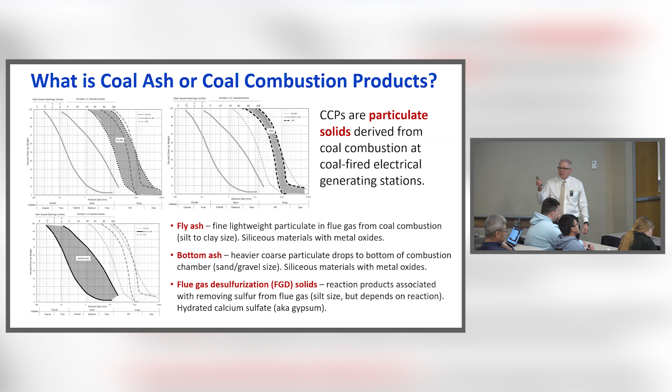That's this stuff up here in the left, and this is a particle size curve. For those of you who have been in your geotechnical courses, this is percent finer and this is particle size. The fly ashes are in the silt, fine sand, but predominantly silt size all the way over to the clay. They're typically very fine, powdery type materials in the silt size particle range.

This is just some examples of fly ash. You can just look like powdery materials. That's what we're catching that's going up in the gas. We're collecting that with either electrostatic precipitation or with a bag house.

Coal-fired utilities generate lots and lots of fly ash as they burn coal, because if you had a fire in your fire pit when you're burning wood, you see the fly ash come up. The same thing is happening in a coal-fired power plant.

The other thing that we generate from that process of burning coal is bottom ash. We generate larger particulate that are too large to essentially move up in the gas stream and float, and they'll drop to the bottom. That's so-called bottom ash. That tends to be more on the fine gravel to sand size, maybe down in the silt too, but falls into this size of a particle size curve. But you look at bottom ash, it looks like gray sand. And we'll collect that as well.

Another thing that we generate often today at power plants, because not only are we concerned about this particulate, but what else is in the exhaust for the flue gas from a coal-fired combustion? Greenhouse gases. And what else? Everybody remember about acid rain? Right, sulfur.

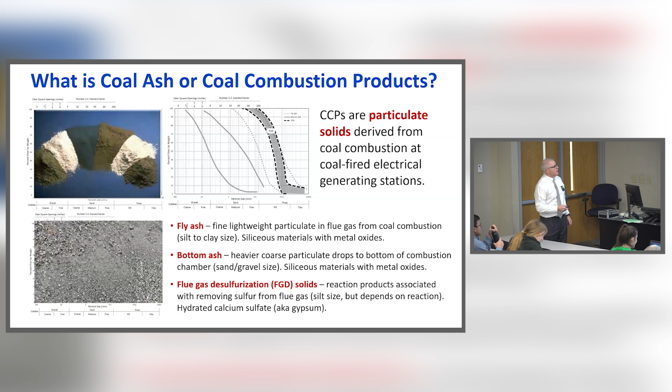So we burn the coal, we have sulfur in the coal, we'll burn that coal, and that releases sulfur into the flue gas. If we don't capture that, we'd generate acid rain. So we'll capture that sulfur as well. That's called so-called flue gas desulfurization residual, or FGD. We have to have a good acronym for everything. That's also a fine textured sludge type material. Just a photograph of that as well. That tends to be a hydrated calcium sulfate.

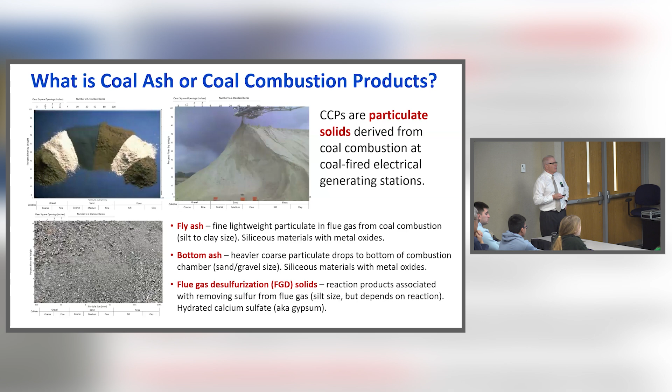So these are the products we're talking about: fly ash in the upper left, bottom ash in the lower left, and flue gas desulfurization solids. We're really going to focus on the two on the left for materials to use as supplemental cementitious materials in concrete. We'll talk about what that means.

Now, there's a lot of different ways to manage coal ash, but two are predominant. One is called dry disposal. That's less problematic, but we have dry ash and we put it in a landfill. But a more common technique, particularly in the eastern United States and the southern United States, but some right here in the Midwest, and I bet there's some here in Missouri, is so-called hydraulic disposal of coal ash.

So you think of, we have a boiler, we're burning the coal, we're generating flue gas, and we're removing the fine particulate from that with a system. We have bottom ash that's being generated at the bottom of our boiler, and we convey that ash with hydraulic techniques. We essentially rinse it out with water, put it in a pipeline, and pump it out to a pond. I think of it kind of like hosing off your garage floor, the particulate off your garage floor. It's not a lot different. You essentially fluidize the particulate, put it in a pipeline, and send it out to a wastewater treatment basin.

Often you'll have the bottom ash, the fly ash, and sometimes the sulfur removal will be commingled with that. A lot of power plants have tried to separate that as well. You may actually have the rest of the wastewater streams as well at the power plant, all going into that same pipeline.

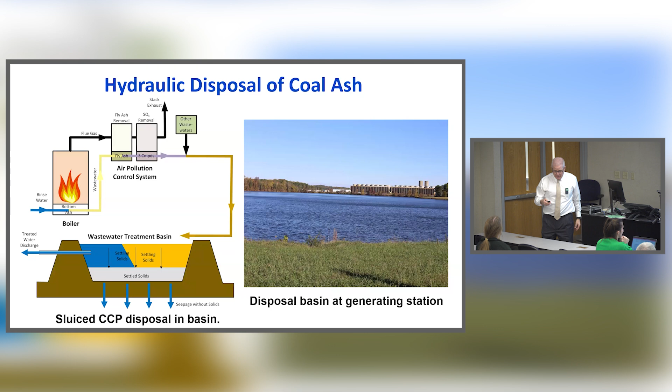So one other strategy that I mentioned is dry ash disposal. That doesn't help with plants where we've had hydraulic disposal, but some utilities moved to dry ash disposal, essentially eliminating that hydraulic system, just collecting the ash and then burying it in a landfill, just like we would have for municipal solid waste or other types of waste streams.

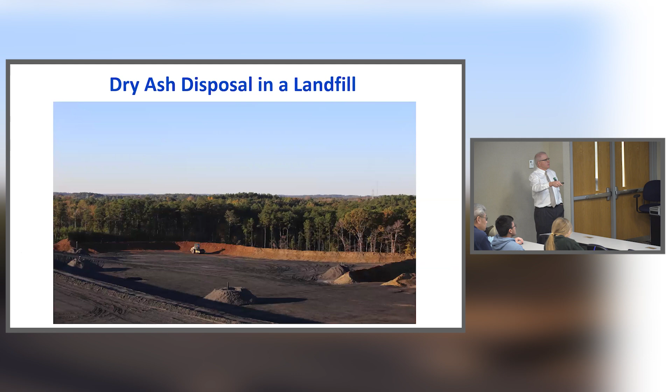Just another example. These are in really great places to go visit, and these are in the mountains often of the eastern United States. Just fantastic, beautiful area.

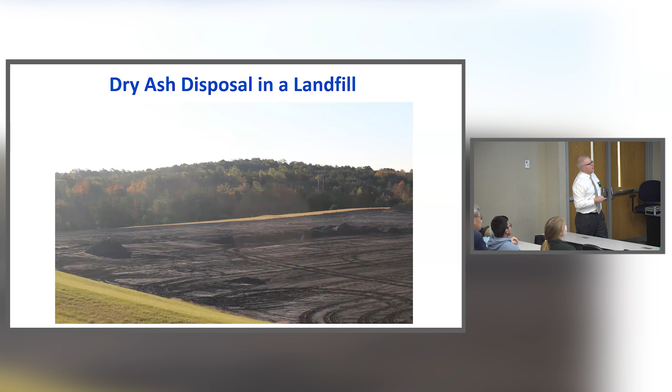Okay, so this got done for years and years. Now, recently in 2015, new regulations were passed called the coal ash rule. Does anybody remember something in the early 2000s that happened with a sluiced coal ash basin, one of those ones like I showed earlier, in Tennessee? Yeah, we had a catastrophic slope stability failure. I think it was Kingston. Quite a situation with fly ash being considered a contaminant.

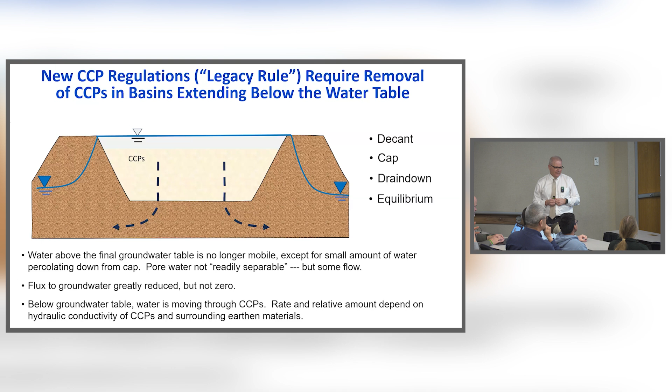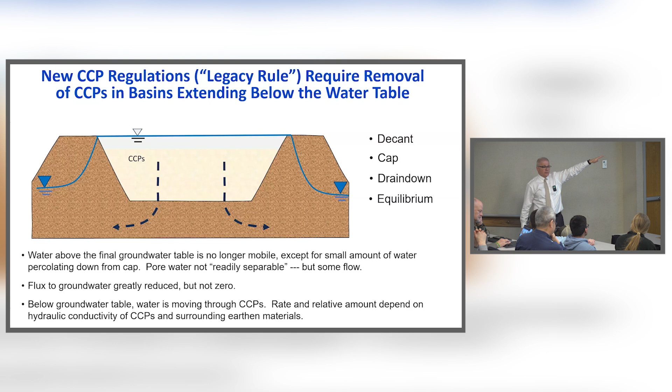In fact, it was interesting, when all this was going on, we were talking about making coal ash a hazardous waste at that time, which would have really changed the rules. It's not a hazardous waste, it's a solid waste, but it's not hazardous. And I actually got to testify in Congress about how that rule ought to be formulated, which was a lot of fun. If you ever get called to Congress, say I'll go, because it's a blast.

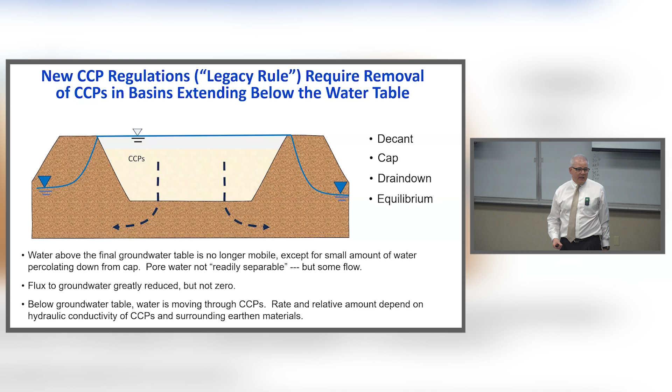Now, that was 2015, and we came up with a whole bunch of new rules. And then in 2024, those rules got revisited, and the so-called legacy rule was passed, the 2024 legacy rule, which had additional implications specifically for these basins.

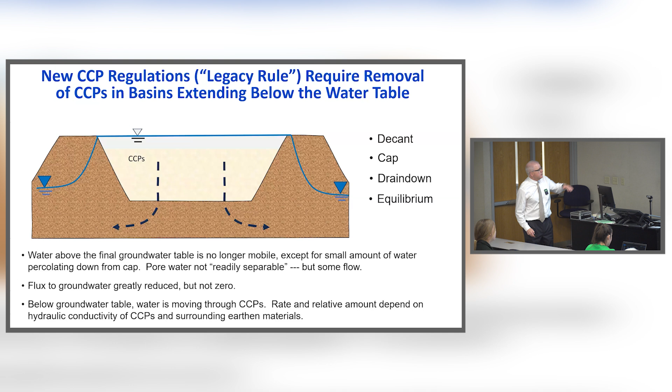Now, prior to that rule being passed, these were being managed in a particular way. They were being closed under the old rule, which said that you needed to stop operating these facilities, and you would decant the free water off the top. So I'd pump that off, and the water comes down, and then I would build a cap over top, essentially closing it to limit the ingress of water long-term. That would be my closure strategy. That was a legal closure strategy up until 2024.

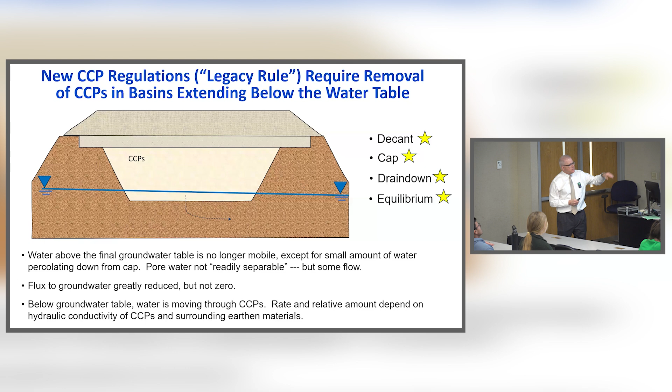A lot of utilities in the East followed this strategy. They closed sites using this approach. They decanted, they built a cap on top, and they were done. The idea was, once you've done that, this water inside is slowly going to drain down and ultimately reach an equilibrium with just a little bit of release to groundwater. That was the plan, and many of these were built.

Then people changed their mind, right? Maybe that wasn't such a good idea. The legacy rule promulgated in 2024 said this was a fine closure strategy, provided that none of the pore water in the coal combustion products was so-called free water, or could be mobile. Now try to find how free water is defined in any true engineering or physics textbook. There's no free water, this is a regulatory definition, not a real definition. But what it implied is that particularly if I had any of my ash below the water table, where pore water might migrate through it, that was no longer allowed. Even if you closed it in place and it's been signed off on by the state government, sorry, you're not done. You're going to have to go back and excavate all this and move it somewhere else. That's what the 2024 legacy rule required.

And the large primary approach to that is we'll go build a new landfill nearby with a modern engineered lining system, which we know works extremely well. We'll build one of those nearby, excavate this out, dry it some, and then drive it down the street and put it in a new landfill. The idea is to protect the groundwater.

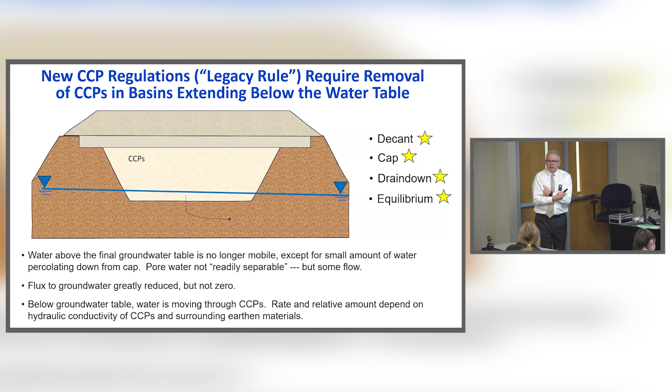It goes on your electric bill, right? So you, as a customer and as a citizen, you ought to be asking yourself, is this the best thing we should be doing? Does this make the most logical sense? And actually, are we having any improvement in the environment? So we'd be asking ourselves, does that make sense?

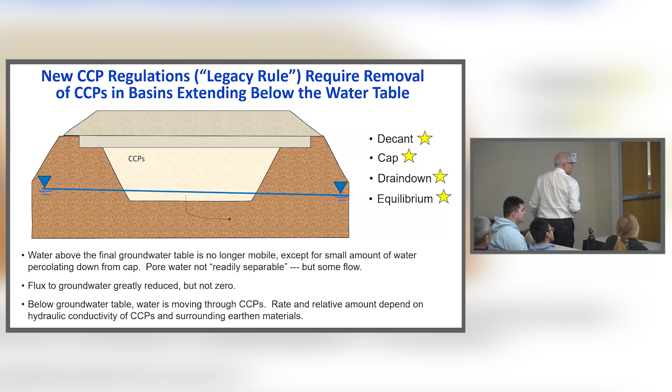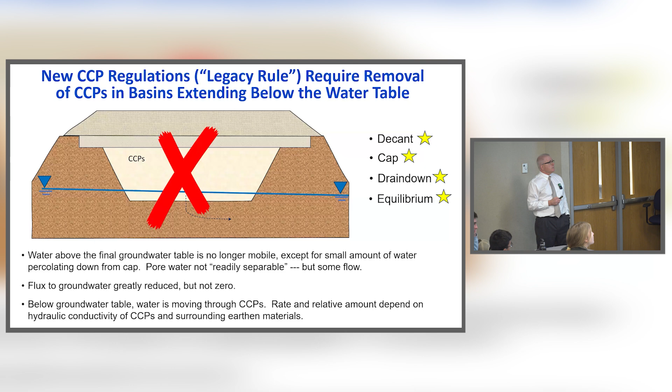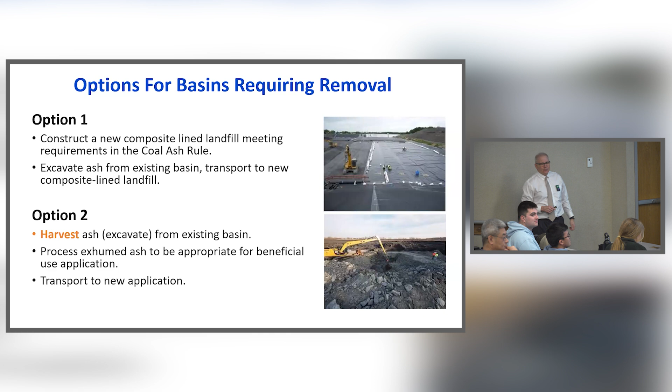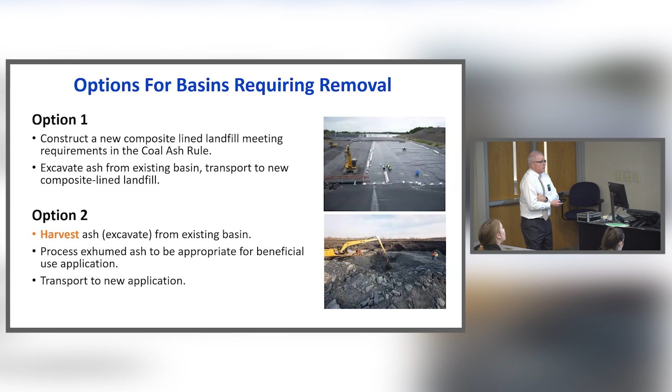We use conventional fly ash in concrete. Who's had that in their concrete materials class? Everybody can't deny this, right? Some of you had concrete, I thought I saw a hand over here. Yeah, we have a volunteer, right? We use fly ash in concrete all the time, it improves the quality of the concrete. Maybe we could harvest ash, process it, and use it as a so-called supplemental cementitious material. And does that promote sustainability?

This is what sluiced coal ash looks like. It's in a basin. This looks like a sedimentary deposit, doesn't it? If you're in geoscience, that's because it is. Now, it's not a natural sedimentary deposit, but it is a sedimentary deposit. It's ash material, different types. Over time, the coal source changes, operations at the plant change, the characteristics of that ash change, and we get something that looks different over time. We get different layers, but that's normally consolidated, nearly saturated coal ash in one of these coal ash basins.

Here's a sample of it taken with a Shelby tube. You can see it's saturated. This is in a tube sampler, one in my lab. We've spent a lot of time trying to characterize the hydraulic properties of these materials to put into all kinds of nifty models. But that's what it looks like.

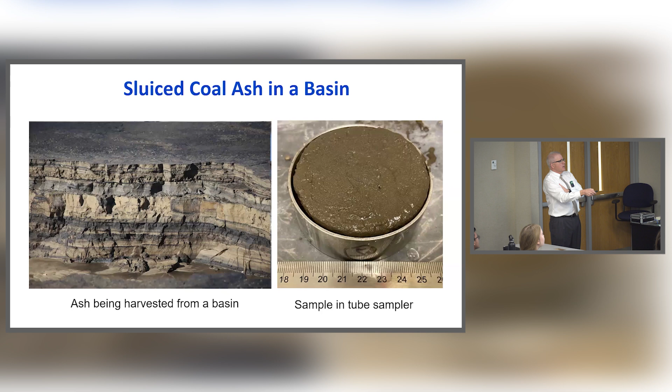There's another example. You can see the layered structure just from different changes in the coal or operations at the plant. And this, what you're seeing here too, is ash that's being harvested. They're actually going in and excavating it out over time.

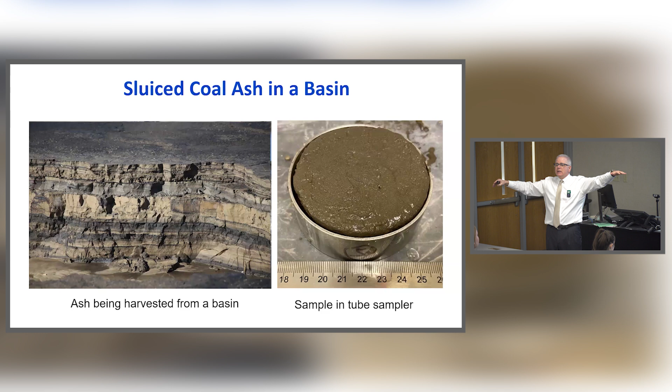Just to provide a little context too, you saw that pond I showed earlier. The size of these ponds is enormous. These may be 300, 400 acres in size. They're big. And a power plant might have 1, 2, or 3 of these. So this is a big excavation project, lots and lots of ash.

How can we do this and do something that's actually promoting sustainability, right? So we're thinking about, if we do this, can we somehow reduce our energy consumption in our society? Can we reduce our greenhouse gas emissions? Can we reduce other environmental impacts?

One way to do that is to look at this as a partial replacement for Portland cement. We don't think of Portland cement as a major source of greenhouse gas emissions, but it is. It's a really substantive source, and we'll see why in a minute. About 8% of global greenhouse gas emissions come from producing Portland cement concrete. That's an enormous amount, nearly 10%, 8%. It's a large quantity. If we could alter that in some substantive way, that would be a real win.

We can do that by partially replacing some of the Portland cement that goes into concrete with ash, either from a fresh power plant or ash exhumed from a basin and processed. We call that ash a supplemental cementitious material, or SCM, because saying supplemental cementitious material 20 times fast is hard, right? So taking some of that cement out and replacing it with the ash could improve the sustainability metrics of our concrete.

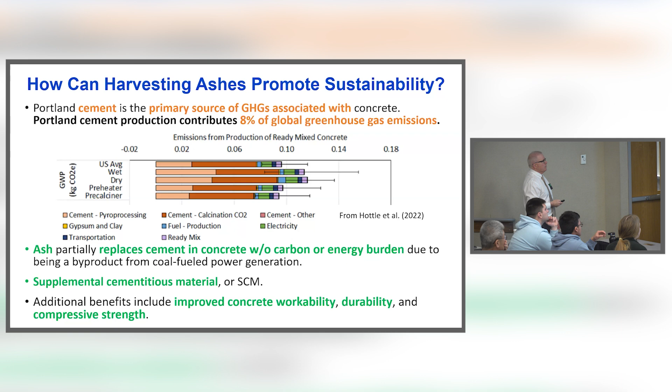Where do the greenhouse gases come from? One of the things I love about civil engineering and many parts of engineering is all the brute force things that we do. We do all these analyses in class, mechanisms and calculations, but so much in practice is big brute force things. And one of those is how do we make Portland cement.

We take limestone - lots of beautiful limestone in this area, by the way, I saw some of it this morning when I was out for a hike. We take clay: the limestone gives us calcium carbonate, clays give us aluminum and silica, and then we'll also add some iron in as well. Sometimes we get that along with the clay, depending on the source. We take all that material and put it into a cement kiln. Where I grew up, we had lots of these cement kilns right around where I lived, so I was very familiar with these. And this is a brute force process.

We put this into a kiln - it's a big rotating tube. All that particulate is in there, and we're firing it at the end. We've got a flame injected in the end, and we're putting energy into it. What are we doing with that energy?

We're doing so-called calcining. Essentially, we take that calcium carbonate, that's what limestone is, and we blow that molecule up. We create calcium oxide and carbon dioxide - we take the energy from that fuel and use it to break it up and create these two products. At the same time, we're blending in other components to create so-called clinker. Clinker is essentially the base material for Portland cement. We then grind that, and that creates Portland cement.

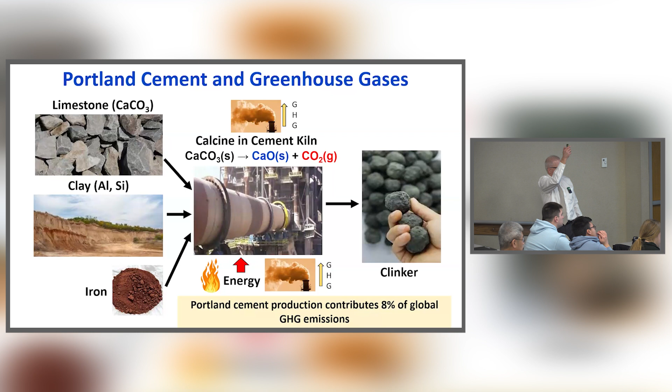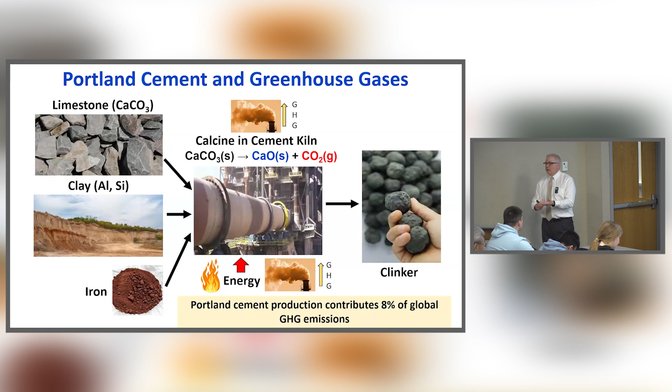Really simple. We take that limestone - it's got carbon dioxide in it - and I heat it up to blow it apart to create the lime and carbon dioxide. There's your greenhouse gas right there. And also all this combustion that's going along with it, which is normally fired by either oil or natural gas, sometimes waste solvents are used for it as well.

So we could potentially avoid some of that by replacing the cement with so-called supplemental cementitious materials, like ashes. The SCMs are silicaceous, aluminosilicaceous, or calcium aluminosilicaceous - we've got silica, aluminum, and calcium, powdery-like materials that we can use as a partial replacement for Portland cement in our concrete. And fly ash is this silicaceous particulate.

It's this fine particulate - we talked about it being silt-sized, but the particles aren't like soil particles. They're not angular - they're more spherical particles from the combustion process. We can also use these as a cement kiln feedstock, but we're going to focus today on just using them as a replacement for cement.

Why might we be interested in this? Well, we've been using fly ash in concrete for years and years, and we always had an abundant source of it coming from coal-fired power plants. Early in my career, when we were working on different uses of fly ash, I realized there was a whole commodity market based around collecting ashes from power plants and selling it into concrete production.

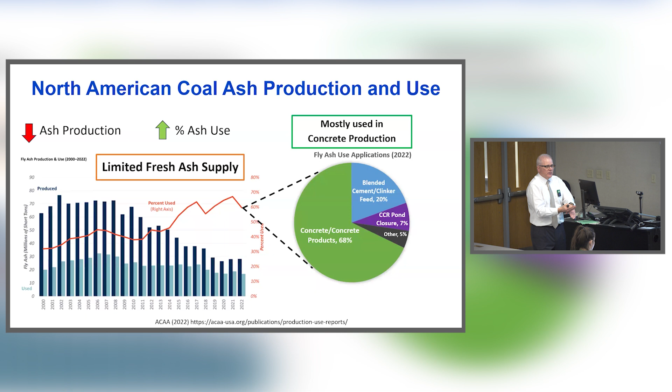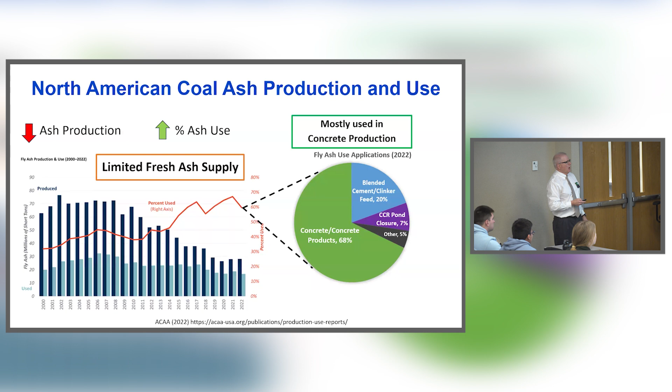So potentially this is a viable source - to use ash from these ponds and from landfills, excavating it and putting it right back into our concrete stream, if it makes sense. This is actually going on in significant efforts, particularly in the eastern United States, but some in the West as well. Just some examples of work that we've been doing for EPRI.

There are state mandates both in Virginia and North Carolina to excavate those existing basins outside of the legacy ash rule. These states have essentially told their utilities all those basins will be removed. The others will be doing it shortly after this, now that the new legacy coal ash rules are in place. You can see all these different stars are places where harvesting is being conducted - they're exhuming it and processing that material to use in concrete.

But you can't just dig it out of the ground and use it right away. You've got to dig it out and process it so that it has the properties like the C618 ash that we would normally use, like regular dry fly ash coming out of our plant.

We've got to excavate it. We've got to dry it because it's saturated, right? It's been placed under water. We've got to often do some particle size processing. We have to grind it so that it meets ASTM C618 requirements for concrete. We'll often have to do a so-called carbon treatment.

These ashes were put in place, just sluiced in, right? Sluicing is the industry term for hydraulic disposal. And they include unburned carbon. They may include carbon amendments that were meant to pull other things out of the exhaust, the flue gas, like mercury. Those carbon treatments, that residual carbon in the ash, really has negative impacts on the concrete. Our concrete materials people can tell us more about that later, but we've got to remove the carbon, right?

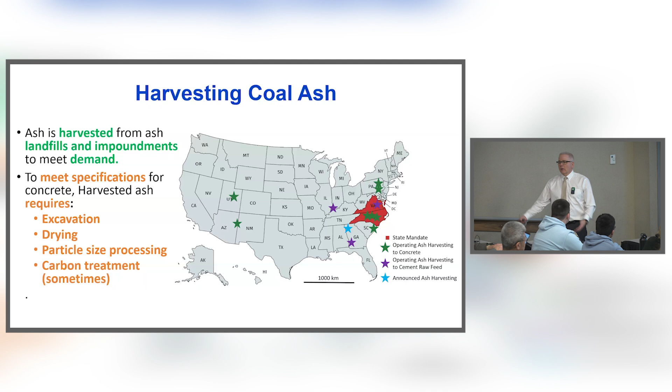And that takes energy. So all these steps to process it take energy, they take work, they generate emissions. And the question is, after I do all that, does this make sense? Is this going to be better than just using plain old cement alone, or better than using conventional dry fly ash out of the plant? So that's the question. Does this really contribute to sustainability if we're doing it?

And so we did that using a tool called life cycle analysis. Who's used LCA or has learned some of that? Got some good volunteers, right? We got LCA volunteers. So we did a life cycle analysis.

Essentially, people originally called this pollution counting. But you're going through all the processes and examining how much energy I'm using in each step, how much greenhouse gas emissions I'm generating in each step, how much water I'm using. Sometimes I'm looking at how much toxicity I've induced into different water supplies. We'll look at some of that a little bit later. But it's essentially an accounting tool to look at different impacts on the environment.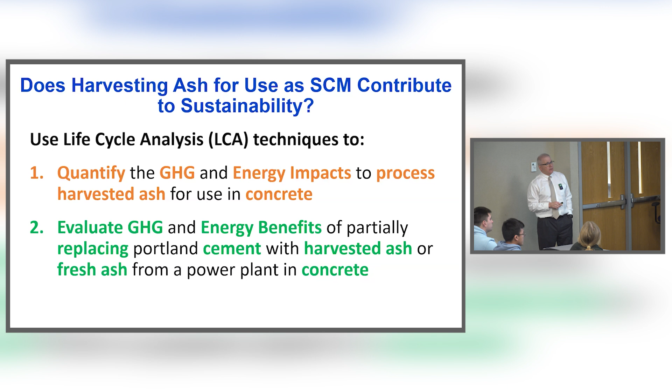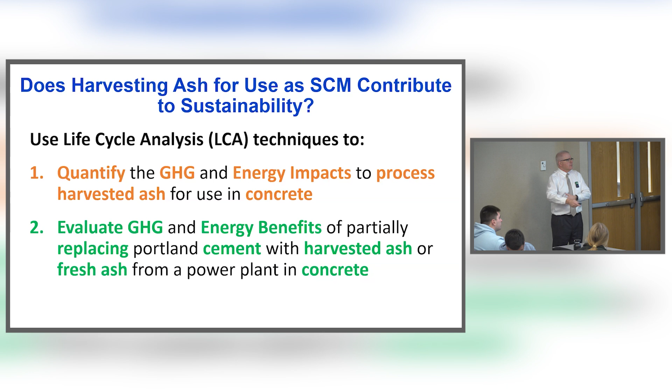And we use that to quantify both greenhouse gas emissions, or GHGs, and non-renewable energy consumption, or energy impacts, from what it took to process the harvested ash and to use it in concrete. And then we did that same thing, not just to process the ash, but then we did an analysis: once I looked at a meter cubed of concrete, was this still going to be beneficial? Not just comparing fresh dry ash from a power plant to harvested ashes, but actually once we got it into the concrete as well. We'll look at it both ways.

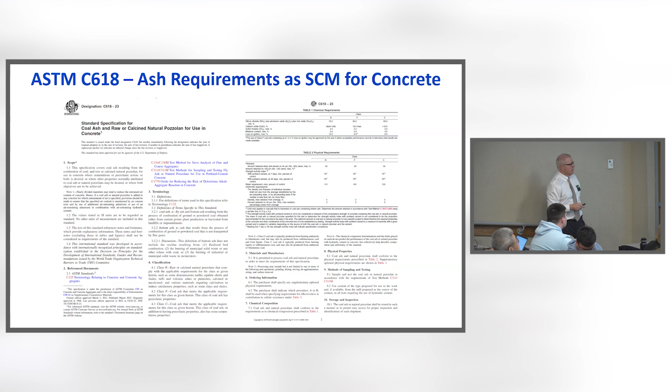Basic requirement is that the ash has to meet ASTM C618. Not all ashes are going to meet that, even if we do all the processing. They may not have the right chemistry. So that's one thing immediately we have to look at. We're going to assume that any ash we'd process for this application at least has the basic chemical requirements. But there are particle size requirements, carbon requirements, and those other requirements require processing that takes energy and creates emissions.

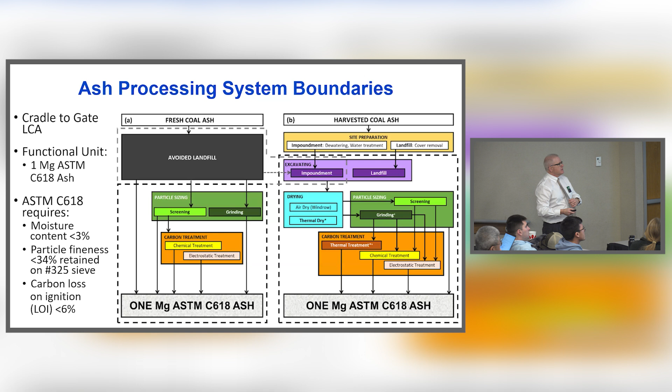So we do that with an LCA, and we're going to have several busy graphs, but I'm going to talk you through them. We need to look at the different steps in this analysis, and we look at what's called a system boundary. Essentially, we draw a box around the different unit processes that we need to consider in our operation, and we'll analyze our impacts inside that box, the system boundary.

And so in this example, fresh coal ash, right? I've got two different ways I can look at that box. I could have this fresh coal ash coming out of my power plant, and I could look at this dashed box here where I'm just taking that, and perhaps doing some particle size adjustment, some screening, some grinding, maybe some carbon treatment, and creating some C618 fly ash that I could use.

I might also consider that if I'm using that fresh ash, I don't have to build a landfill, right? I don't have to put it in a landfill. So I could have a landfill avoidance credit as well. So I might make that boundary a little bigger and have it go all the way up around here.

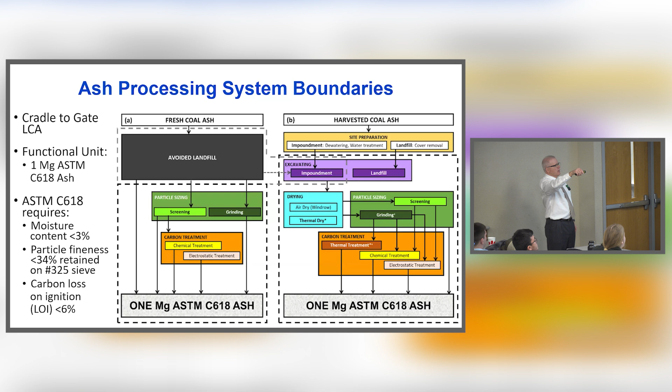So it's not only evaluating the processes to get the ash ready to use, but also the advantage of not having to bury it in a landfill. I do the same thing for my harvested ashes. I'm going to look at each of these processes, and I'll acknowledge that I'm not going to build that landfill we talked about. I'm not going to excavate these and put them in landfill. I'm going to excavate them, process them, and send them to a concrete plant for use in place of Portland cement.

In that case, I've got all these different processes to consider. I've got excavation, I'm going to have to exhume that material, dry it, particle size it, screen stuff out, grind it, and do carbon treatment to remove the residual carbon that creates a ton, or one megagram, of ASTM C618 ash.

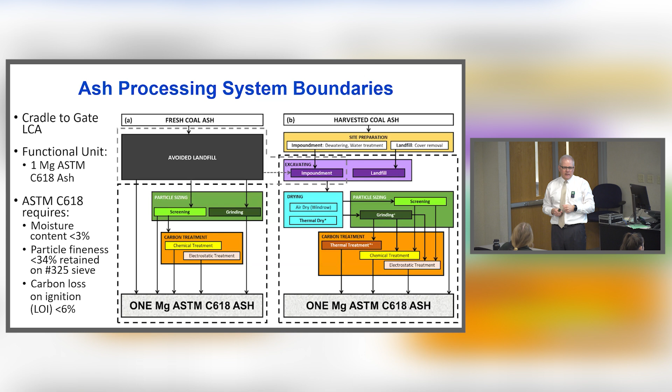Now the particle size adjustment coming out of that basin, which has been in hydraulic disposal, is a little different from what we'd do at the plant. The plant's pretty easy - I generate fresh dry ash, do some sieving on it, maybe a little bit of grinding. But when I'm hogging out that stuff that's been in a basin, I call it a basin...

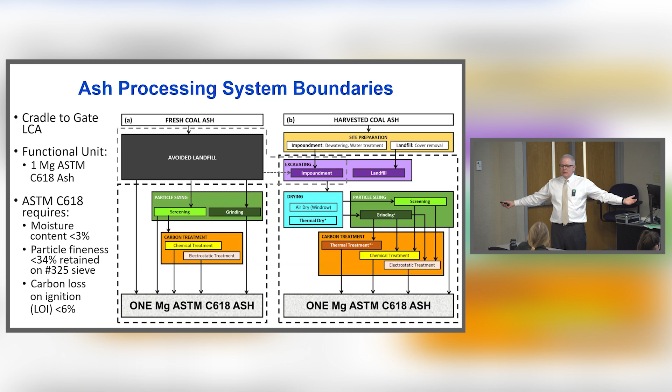I'm digging that out - I'm digging out ash, but I'm also digging out old trees. Maybe I'll find an old tractor in there. There's all kinds of things. These were built in the 1950s and operated until now. Everything that's ever been in your basement is in one of those basins too. So there's a lot more involved than just what we'd do for fresh ash - a lot of junk that goes along with it.

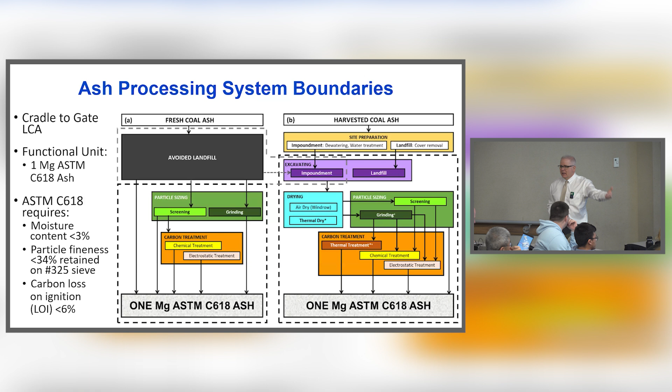For each of these processes, we go in and examine what are the greenhouse gas emissions from that process, what is the energy consumption, and then we add them up and compare it to cement alone or fresh ash alone.

Now, there's a couple different ways you can do that, and I think there's a right way and a not-so-good way. What I see a lot in the literature is people set up this problem and then just buy a piece of software, take a database built into that software, and start typing. I don't think that's the valid way to go about this type of accounting. The way I go about it, and the way we did in this particular project, is I got an industry cohort together that I interviewed.

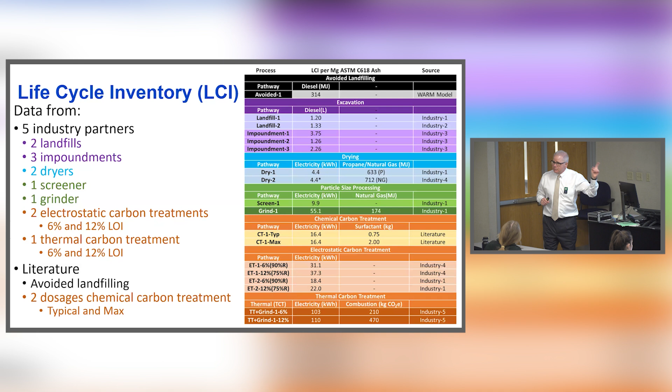Different people actually in the practice of doing this - we were doing this through EPRI, the Electric Power Research Institute. These were essentially all their industrial members. We interviewed them and had them do detailed accounting of the different unit processes at their plants. So we actually got the actual energy numbers off of their operations at their harvesting plants, allowing us to do a really fair, careful evaluation of the energy use.

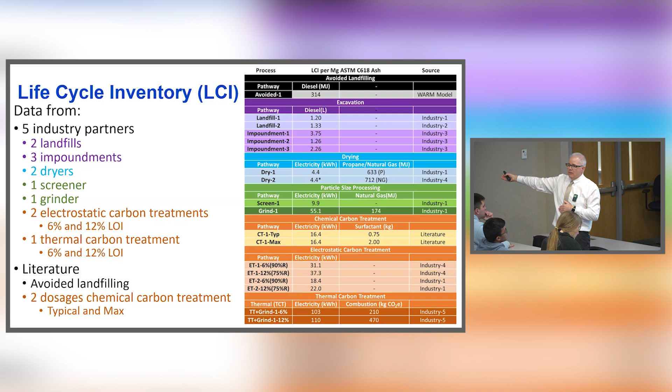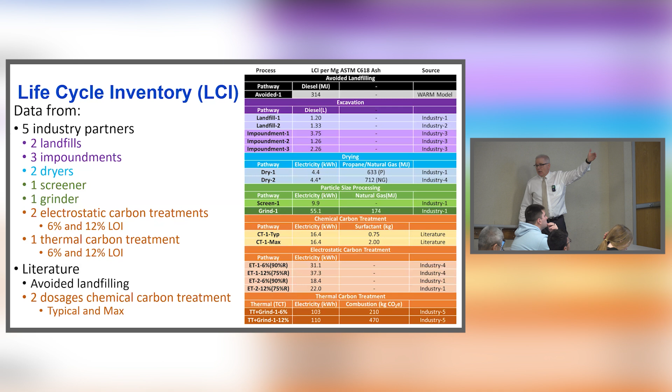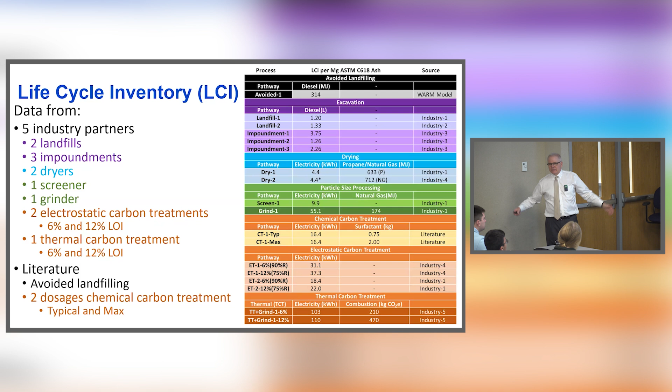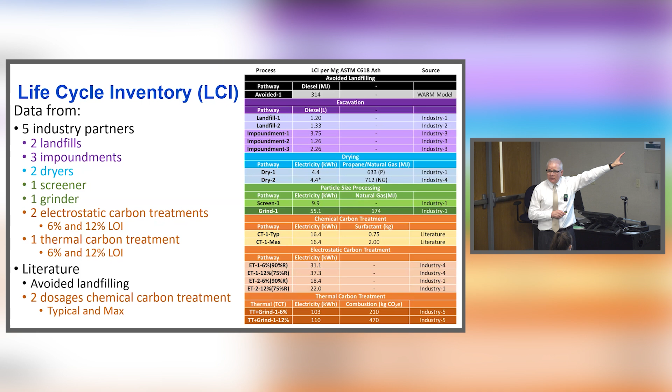We got the fuels they were using too - how much diesel, how much propane is being used, how it's being burned - and then we could apply emission factors to get greenhouse gas emissions from it. So we tried to make this as industry data grounded as possible. We spent the first half of this project meeting and talking with people from industry and gathering their data. This is also great about working with EPRI - you've got all their partners, and they're all interested in helping. It was a blast talking to each one of them, a lot of fun. But we created what's called a life cycle inventory - all this data, made as real as possible from actual harvesting plants and people in practice doing this kind of work.

Once we have that, we stick it into a so-called LCA model. It essentially just takes all the data and adds it up for you. It's a nice, convenient tool. You can do it yourself in a spreadsheet, but you can use a piece of software to do it more elegantly. We use SimaPro, a very well-known LCA software.

Most of our data came out of our industry database, but a few things we had to add from other databases: the US LCI database, the EcoInvent database, and EPA's WARM database, just for some things we didn't have data for. We took all of our LCI and put it into that software project.

We had it calculate these different impacts from different processes. For example, we had it calculate the greenhouse gas emissions from excavating the ash, whether from a landfill or from an impoundment, per ton of ash we're producing at the end. Interestingly, excavating from a landfill creates 4 kilograms of carbon dioxide equivalents, whereas from an impoundment, 7.7.

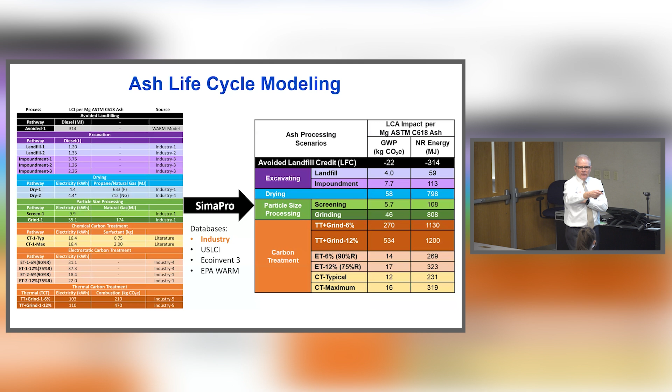Why would excavating from an impoundment generate more greenhouse gases than excavating from a dry landfill? It's heavier, full of water. So when I'm excavating, maybe a third of my mass is water that I don't even want, but I've got to pull it out. That's not true in my landfill - I have very little moisture there. In fact, at the dry ash landfills being harvested, they actually use it without even drying in most cases, which is pretty remarkable. But yeah, it just takes more work.

Same with the energy - you can see excavating it out of our basin or impoundment uses twice as much energy. The drying process is very energy intensive as well, but you can just look through these different metrics.

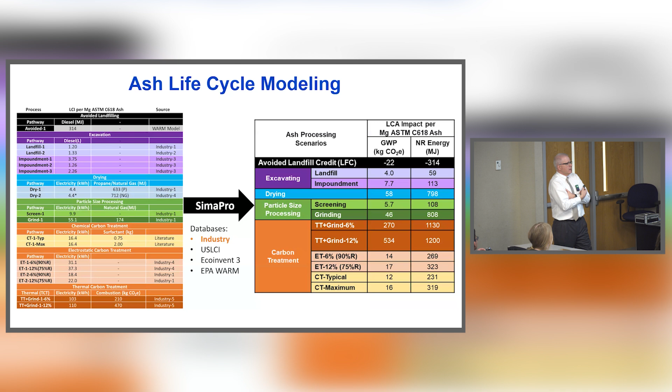We went through these for each case - processing, whether screening it, grinding it - and then we looked at different carbon removal techniques. We used so-called thermal treatment. Does anybody know what thermal treatment is? That's a very elegant word for saying I'm going to burn it. I already burned carbon at my power plant, so I'll just burn a little bit more - burning off the residual carbon in the coal, and you can pull some of that heat back, which is good. We can use some of that in the drying. We did that for low carbon, 6%, 12% carbon ashes.

We used another thing called electrostatic treatment. Essentially, we run the ash on a conveyor belt which has charges on two different sides, and by that charge difference, it will pull the carbon particulate out of the ash. That's electrostatic - not quite as efficient a carbon removal as I get with thermal treatment.

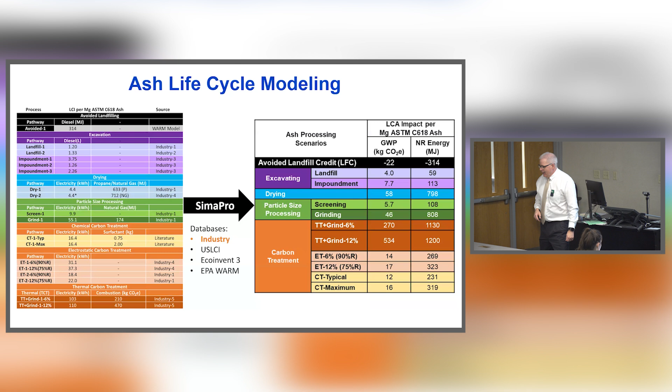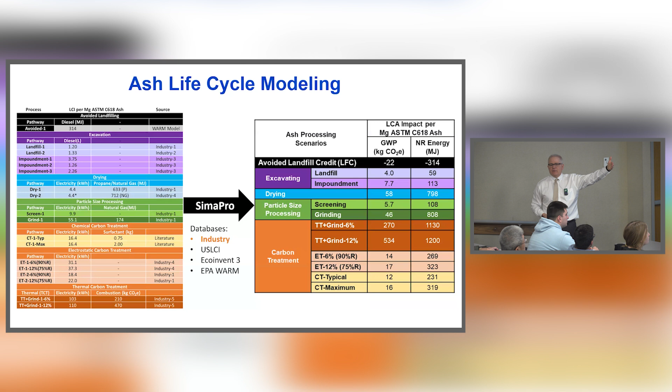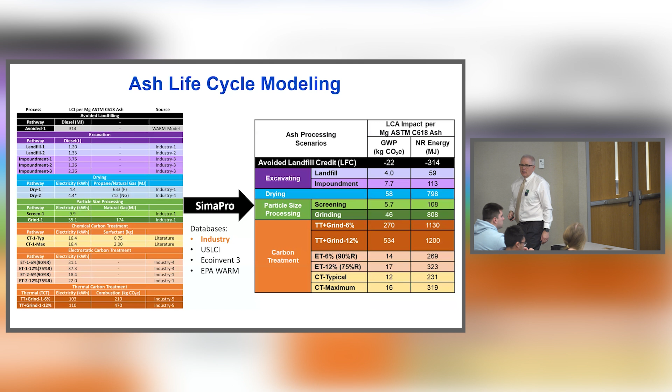Then there's another technique called chemical treatment, where I apply essentially a surfactant to the ash, and it bonds onto the carbon faces, the carbon surfaces, blocking those surfaces for interaction with, for example, air entraining agents in cement. So I could do chemical treatment, electrostatic treatment, or thermal treatment. We did all the analysis for each one, and these are all based on industry data, not stuff I made up or got out of a database from a piece of software - this is all out of industry information from their plants that they're running.

All right, what did we find? These are busy graphs, I apologize, but this is about as simple as they can get, and I'm going to walk you through them. We're going to look first at global warming potential, or greenhouse gas emissions - kilograms of carbon dioxide equivalents per megagram or ton of C618 ash that we're producing.

On the x-axis, we've got different processing techniques. We step from the left side, which is just taking fresh ash out of a power plant, not harvesting - just taking that fresh coal ash and using it straight away, not even processing it. Then I move from left to right: maybe I have my fresh ash and have to screen it, my landfilled ash has to be screened, my ash from an impoundment or basin has to be screened. Then screening plus grinding, then adding chemical treatment, electrostatic treatment, or thermal treatment. In each case, as the bars get bigger, that means my total greenhouse gas emissions through processing the ash is getting bigger.

So as I do more processing, I'm going to generate more greenhouse gas emissions. That makes sense, right? I'm going to be doing more stuff to it. First of all, over here on the left, fresh ash. It's negative. How can that be? How can my fresh ash have a negative greenhouse gas emission?

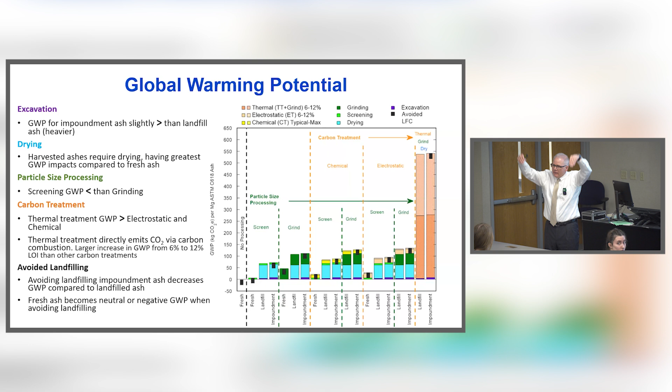Yeah, the grinding is one of the big ones, right? That's the dark green. Why is grinding? How do you grind this stuff? Has anybody been to an industrial grinding operation? We have actually big rollers, run by big electric motors. You pour the ash through, and it's just brute force processing, and it just crushes it. But I've got big electric motors running it. They run off electricity, which comes from the power plant, which comes from coal.

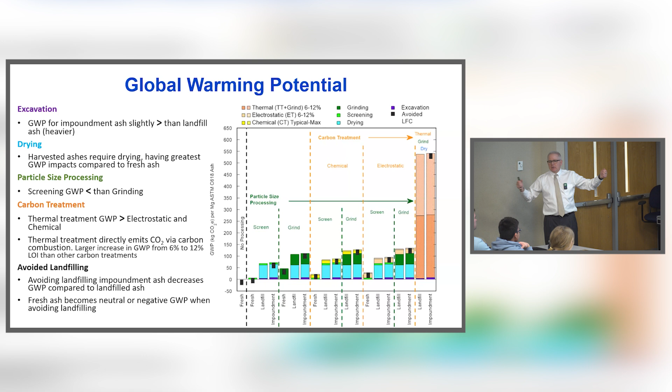So that generates a lot of energy, and screening is as well - I've got to put it on a screen and shake it. That generates a lot. But the big guy here is if I do thermal treatment, I generate a lot of greenhouse gas emissions. If I don't, I use one of my other strategies that are pretty modest. That's an important lesson learned.

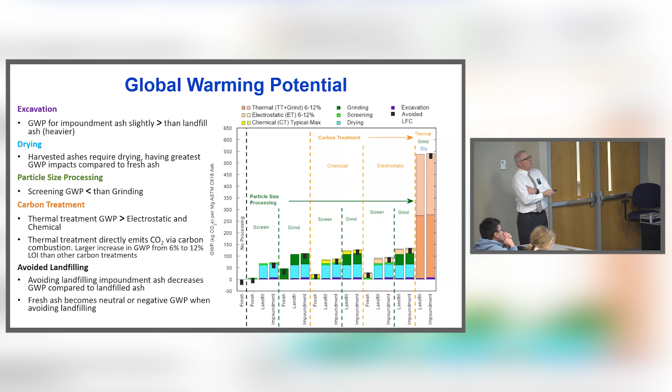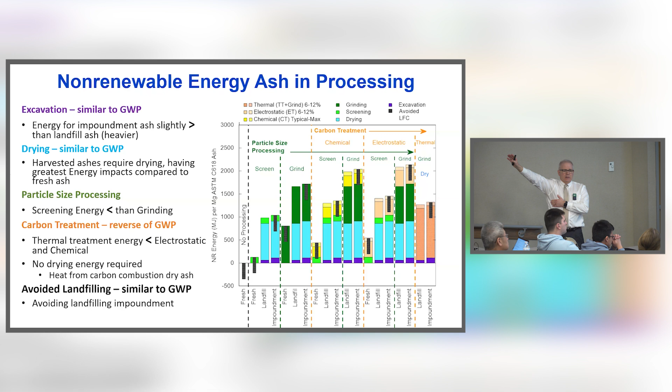But remember I talked about how the thermal treatment was the big greenhouse gas hog, right? But when I move over and look at it from our energy consumption, it's the lowest of the different options. Why is that? Well, the energy's in the carbon. I'm burning that, essentially the energy that's in the carbon, so I don't have to add energy to it.

Whereas my chemical treatment method, I've got to actually produce that chemical, I've got to pump it in there - it takes energy to do that. My electrostatic treatment, I have to run electricity through it, it takes energy to do that as well. But it's more processing, more energy, but not quite as dramatic as we see for the greenhouse gas emissions. That carbon treatment is the one thing I talked about - it's the opposite there.

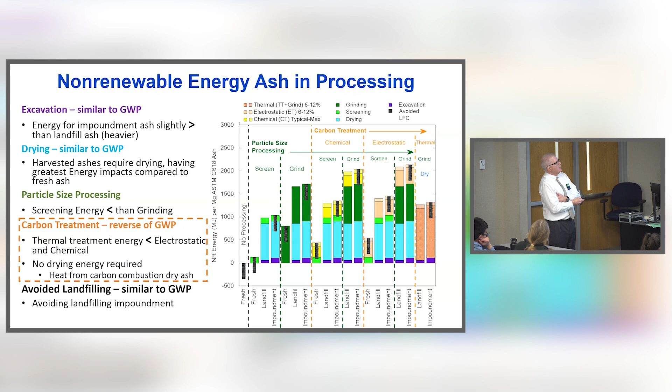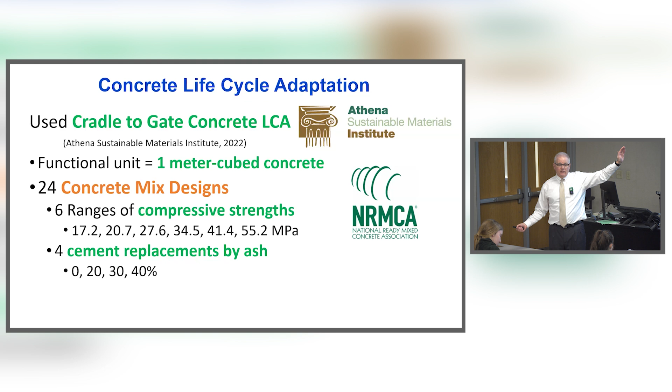So that's all about making the ash. I guess what we look at there, that hasn't shown it's actually better than anything. It's just giving us a sense for what it takes to make that material. Clearly, one thing that comes out of that: there are significantly more greenhouse gas emissions associated with using harvested ash relative to fresh ash. Because remember, fresh ash was negative, right? So it's not as good as fresh ash. The question is, is it good enough?

So let's look at this in terms of using it in concrete, and look at the greenhouse gas emissions associated with creating and implementing different concrete mix designs. We looked at a number of different compressive strengths. These have odd numbers here because these were in English units converted over to SI. We need to stop using English units in this country. Just use SI, come on, move over. Life would be a lot simpler.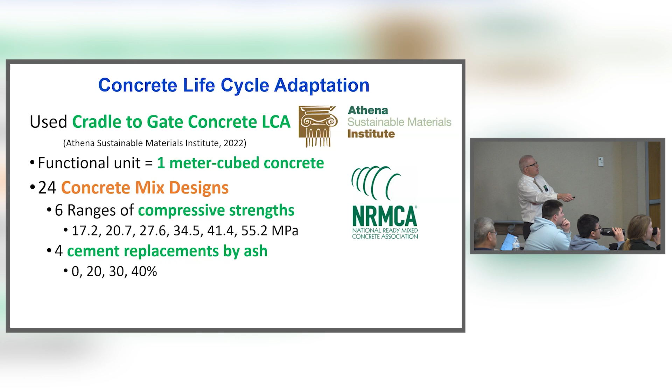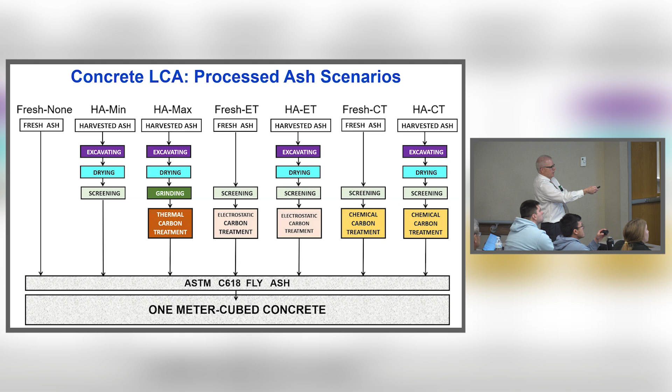We looked at 4 different levels of cement replacement, from none, no ash, up to 40% of the cement being replaced with ash. And we looked at producing 1 meter cubed of concrete. We looked at using fresh ash alone, harvested ash with minimum processing, harvested ash with maximum processing, and then different carbon treatment scenarios: fresh ash with electrostatic treatment, harvested ash with electrostatic treatment, fresh ash with chemical treatment, harvested ash with chemical treatment. We stepped through these different processes and unit processes to create 1 meter cubed of concrete, comparing fresh versus harvested, and then different carbon treatment comparisons.

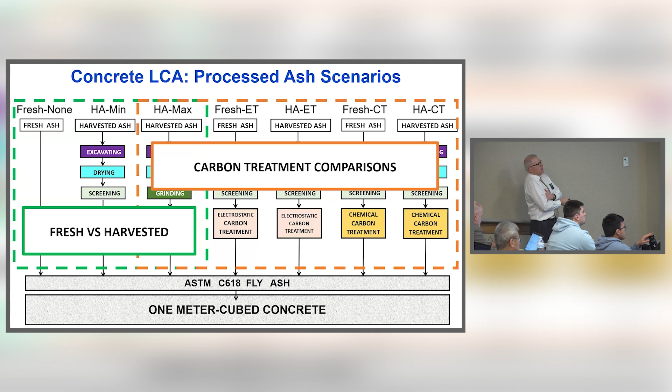Yes, sir? Are you using bottom ash in this study, or is this ASTM class C? What type of fly ash are you showing this for? Is it different in different cases? This is a fair question. The question is, am I using fly ash alone, or bottom ash, or both?

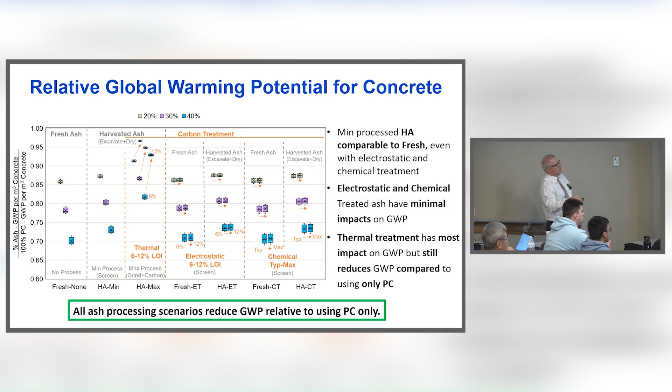When we look at it more broadly, the different types of carbon treatment aren't that different, but thermal treatment is the one that's least beneficial in terms of greenhouse gas emissions. Here's fresh ash, here's electrostatic treatment, here's chemical treatment. They're really not that different at all - just nuances. The key thing is all of these promote greenhouse gas reductions, even despite having to excavate, process, and treat it. It's still sustainable.

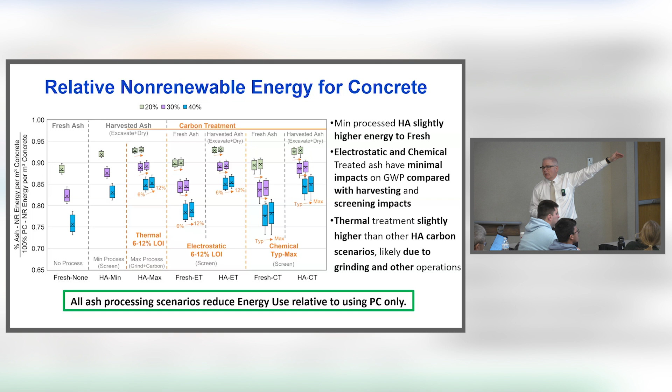We get that same story from the energy component as well. All of these ratios are less than 1. They vary a little from process to process, but they're all less than 1. So is harvesting and processing ash for use as a supplemental cementitious material sustainable? Yes, from a greenhouse gas emissions and energy consumption perspective. This is a much better thing to do than landfilling. It's not quite as good as fresh ash, but at some point we're going to run out of fresh ash, and this is the next best thing.

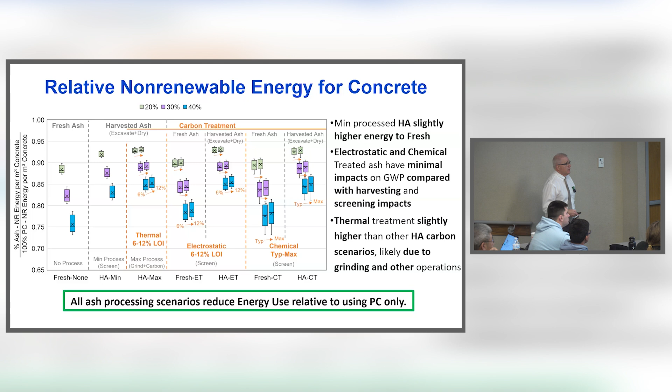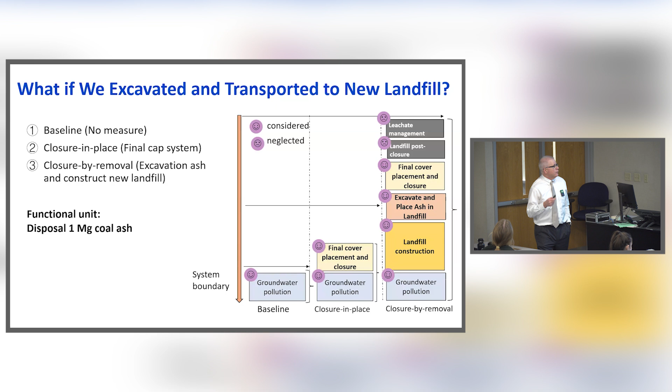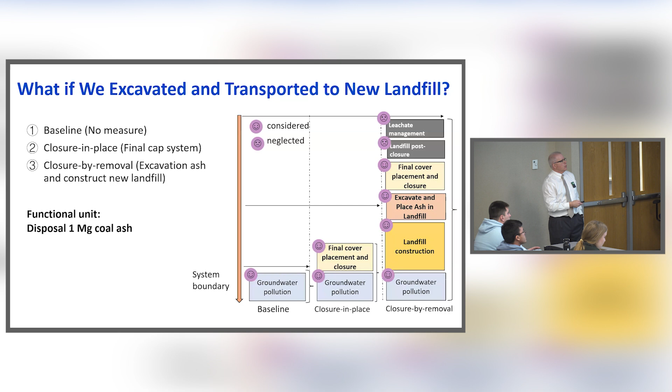I just want to close with a couple slides here. What if we excavated it and transported it to a landfill? I looked at 3 different cases: a baseline where we did nothing, closure in place which we've been doing, and closure by removal, putting it in a new landfill. I went through that same process, did some groundwater modeling, looked at impacts to groundwater, used that as some of the inputs, and these are some of the outputs from similar life cycle assessment techniques.

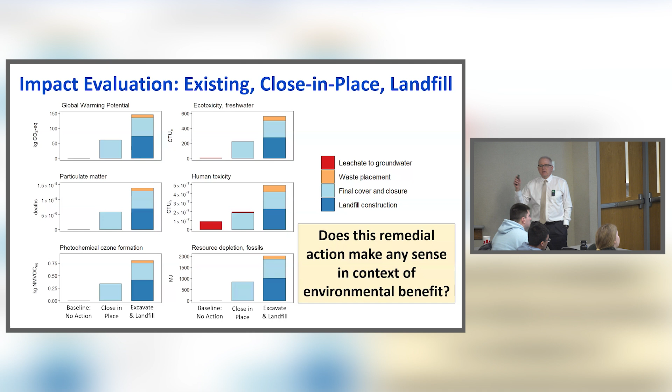What about particulate matter? Deaths from particulate matter from diesel exhaust is a huge issue we don't even think about. Jonathan Holmes at Wisconsin has done a lot of work on this, looking at particulate impacts on health, and it's amazing the significance of diesel emissions. Which one of these creates the most deaths from particulate emissions? We're trying to protect people's lives - it's excavate and put in a landfill.

How about kilograms? I'll skip over this a little bit. Let's get to ecotoxicity, looking at fresh water. Which is worse? We're trying to protect water. Actually, when we look at it from a broader perspective, we have more impacts on water from excavating and putting it in a new landfill. Why is that? What do I use in all my trucks to move this stuff to a new landfill, to excavate and move it? Diesel. Is diesel a clean material to produce? Have you been to an oil field or an oil refinery? No, it has really significant impacts.

So each one of these cases, no matter what we look at, we end up with the same conclusion: by far the greatest impacts on people and the environment is the preferred solution in our regulatory code. And we're spending $3 billion per site to do it. You gotta say, does that make sense?

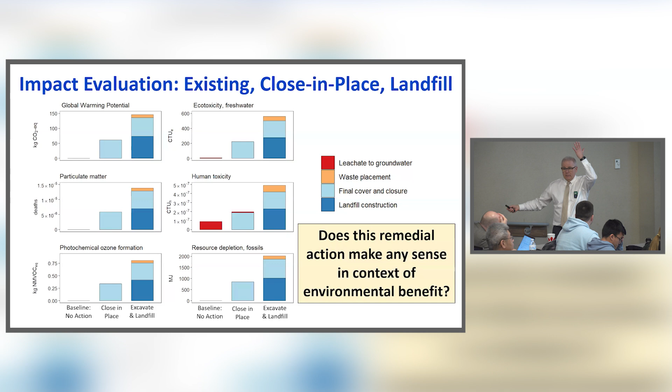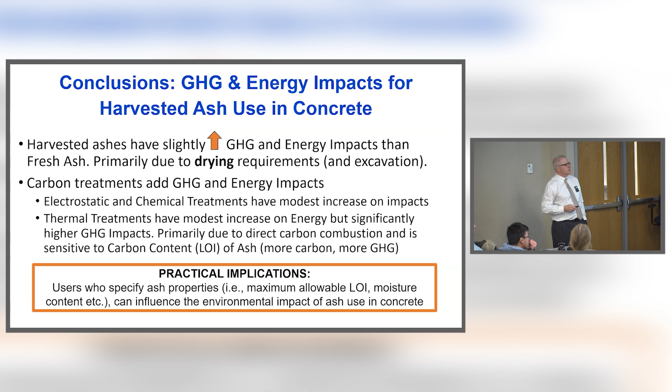So what are our conclusions? From a greenhouse gas perspective and energy perspective, certainly using the harvested ashes is a sustainable pathway. It's not quite as good as fresh ash, but it is a sustainable pathway. It's much better than just putting it in a landfill. The carbon treatments have some nuances - the carbon treatment we choose will change some of the impacts. But in a broad sense, it is a sustainable approach.

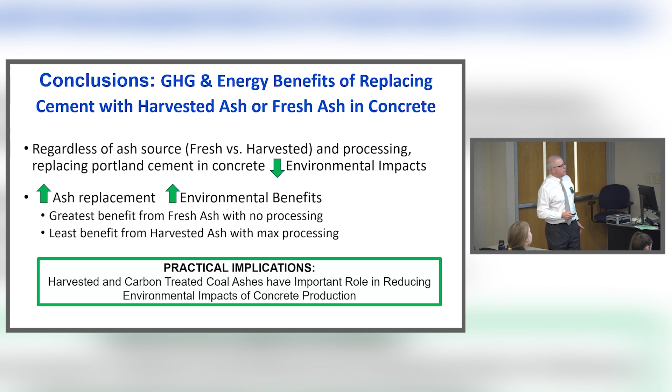And the same thing translates when we look at ash alone versus in the concrete - in a meter cube of concrete, we come up with the same conclusions. It's a sustainable process to use the ash, whether it's fresh ash or harvested ash, in the concrete, rather than using Portland cement alone. So some very simple conclusions.

Excavating it, harvesting it, and using it as a supplemental cementitious material is a good thing, right? That's having benefit to the environment. Perhaps the worst thing we can do is excavate it and put it into a landfill. We're doing that under the guise of trying to protect the environment, protect groundwater. And we probably do improve groundwater quality in a little patch of land, but our broader impacts are enormously different.

This is one of the things that gets people very frustrated with regulation. Oftentimes things are done with a very narrow lens. We create rules with a very narrow lens without thinking about what are the broader implications of this. And we should be expecting that broader thinking when we're making national policy.